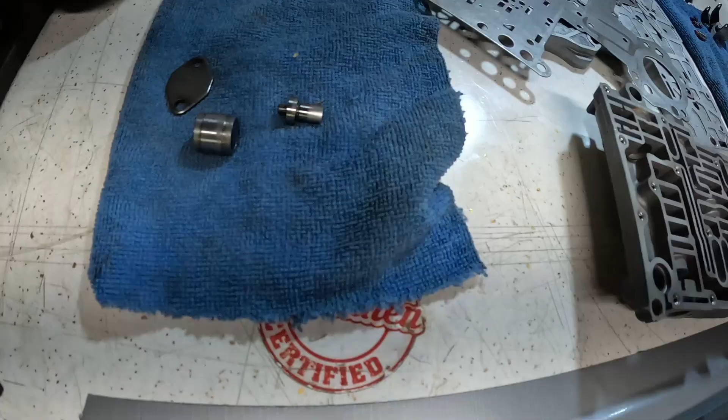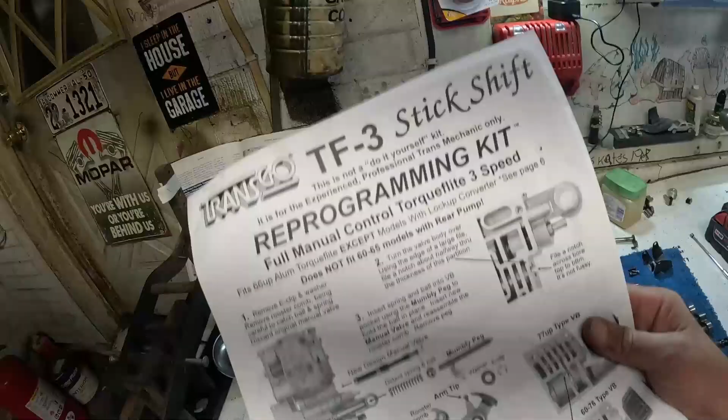All right, so let's get into the kit. Here's your instructions, and they're big and well written. Do yourself a favor, go through these instructions a couple times, just kind of familiarize yourself with it. As you can see here, I've X'd out some spots that don't really pertain to me. This is a 904. This kit does cover 727 and 904, but there is some 727 stuff that won't be necessary. Okay, here's what you get in the box.

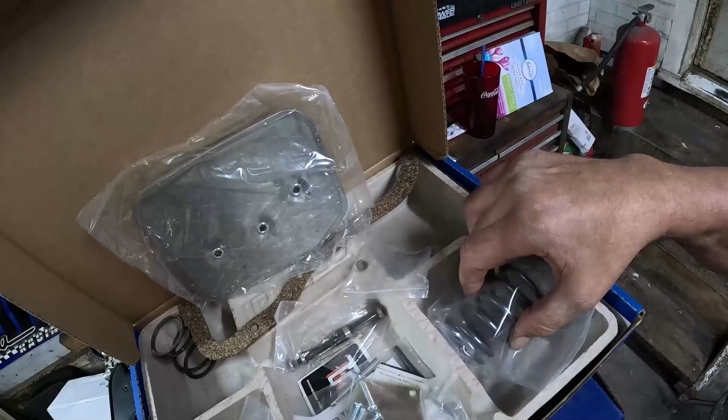Here's a spring. This part here is probably for the 727, the rear servo spring. This one's the 904 one, so we'll actually have to take our rear servo out and install this spring. Okay, just leave it right there for now.

You got some assorted springs, a couple of plugs. One's got an orifice, and there's actually one that is just a plug. It's probably in here somewhere.

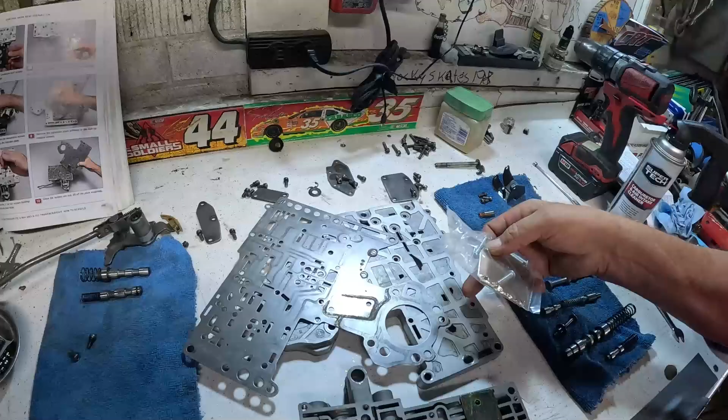There's a shift command plate, and I don't really understand how this works, but if you look at it, it looks like it will. How's it go on? Does it go on like this? I think it goes on like this, so it leaves this hole open, but it kind of seals this hole off. That's all I can figure.

Okay, it comes with this little fixture or jig or whatever, and that's for drilling into the casting. And so what's unusual about this is it's already got, somebody already went in here before and drilled the hole in this casting.

There are several variations of the TransGo shift kits. Some of them are like a systems correction kit, no yo-yo, stuff like that. There's a TF1, which is an entry level, probably just more like a heavy duty for towing or whatever, and maybe for fleet vehicles like taxi cabs, cop cars, stuff like that.

The TF2 is the next step up, and it's a full automatic, and it's got really good, positive, firm shifts. The TF3 is full manual. That's what we're doing here.

So as you get into the kit here, our manual valve will be swapped out for the one that's in the kit. Okay, that's right here, and the kit actually has something known as the mumbly peg, I think, which is kind of a funny name. But here's this valve will go in place of this valve here.

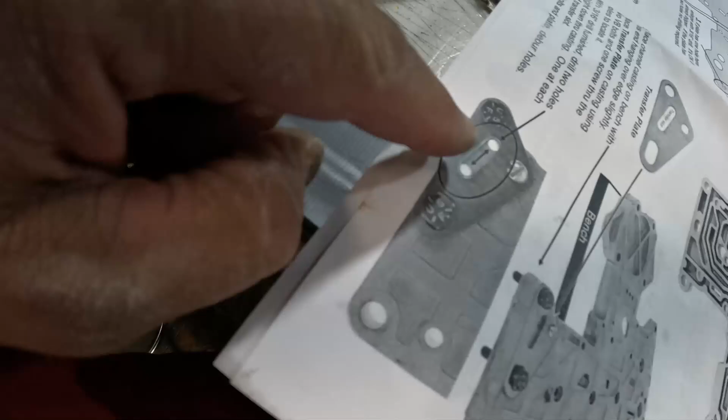We'll need to drill a couple holes in our transfer plate here, for my build or whatever, and then here also. You may have to drill additional holes, depending on the year of your valve body. Then on this casting, we drill a couple of holes here, and then it gets this little transfer slot, sort of rig, kind of like whatever, in place there. Then it gets that cover plate on top of it. All right.

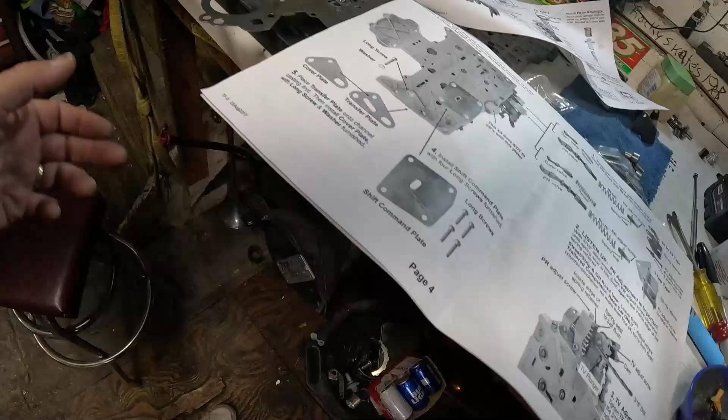So let's see, what else we got here. So this is the 727 rear servo piston, and so that doesn't pertain to me, so I've kind of X'd that stuff out.

I guess I already went through it, but our 904 has this short PLAIN spring that's going to go in our rear servo, so I'll have to take that apart.

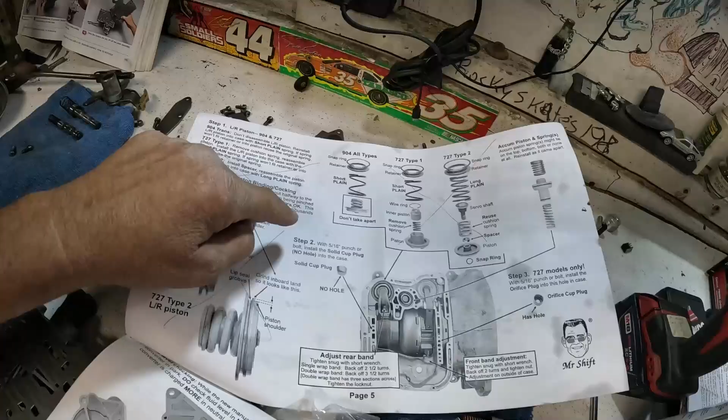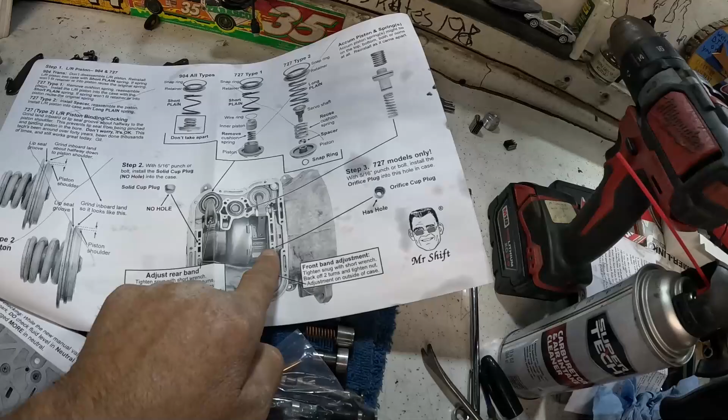Accumulator piston spring, it gives you instructions for what to do there. There's an orifice cup plug that goes in up here. That's for a 727. There's a solid cup plug that goes in back here, and that does not have a hole in it back here. So, like I said, you just gotta kind of go through the instructions and get it right.

I've X'd that out because this is for 77 and up. Mine's 60-76, so I'll have to do this. Put a blue spring in there. Make an adjustment to the pressure, the PR adjust screw.

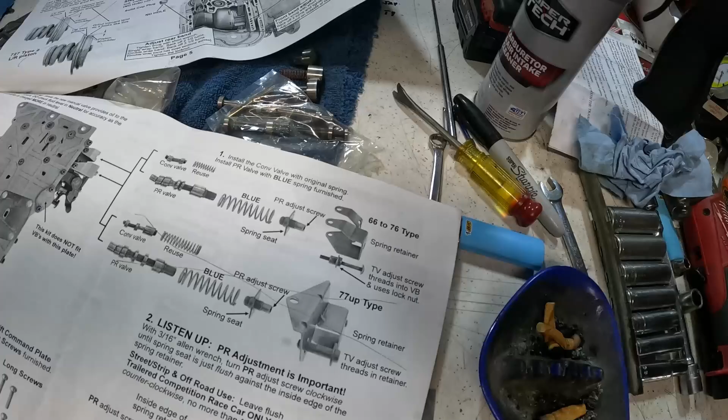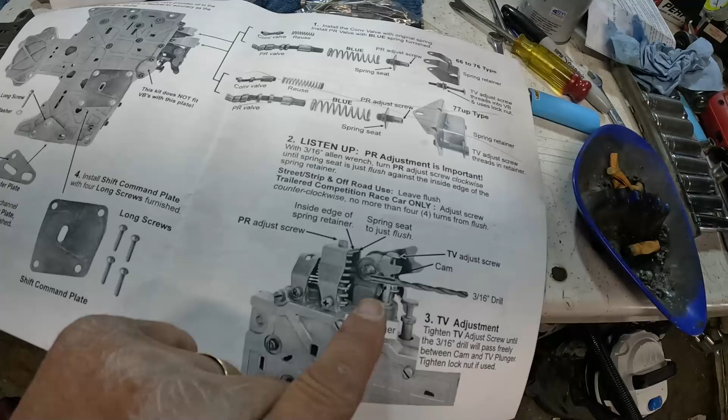It shows putting that shift command plate in place. It shows using a 3/16 inch bit. Check your clearance here.

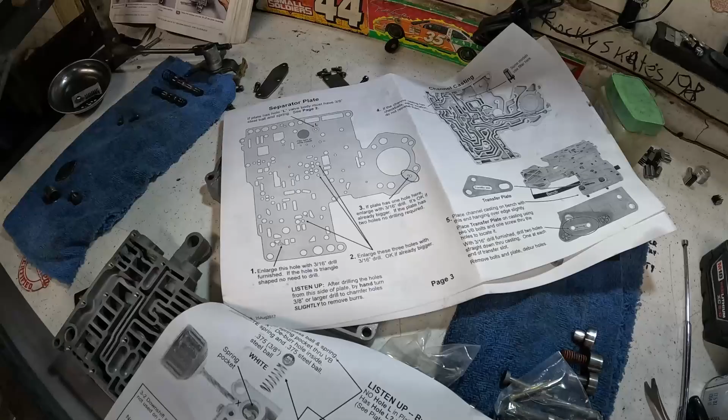Shows separator plate holes that need to be enlarged. And if it doesn't require a hole, it doesn't get one. Okay, so like in my case here, the separator plate, it's got these two little holes here. Mine's actually got one big single hole here. Okay, so I just leave that alone basically.

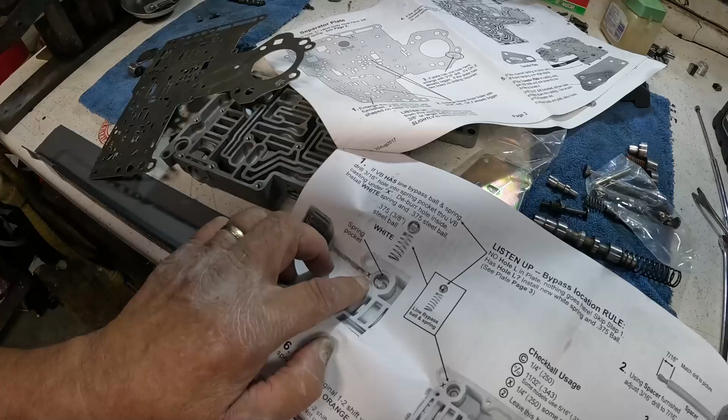Line bypass ball and spring. Mine's got that, but it says here to drill a 3/16 inch hole in the side of the casting here. Deburr the hole, install the white spring and the 3/8 inch ball. Okay, and I've got that sitting over there.

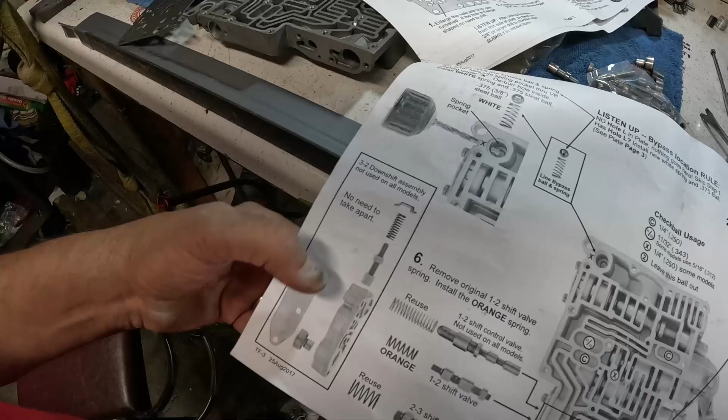This is a kick down valve or whatever, valve assembly, and my valve body doesn't have that.

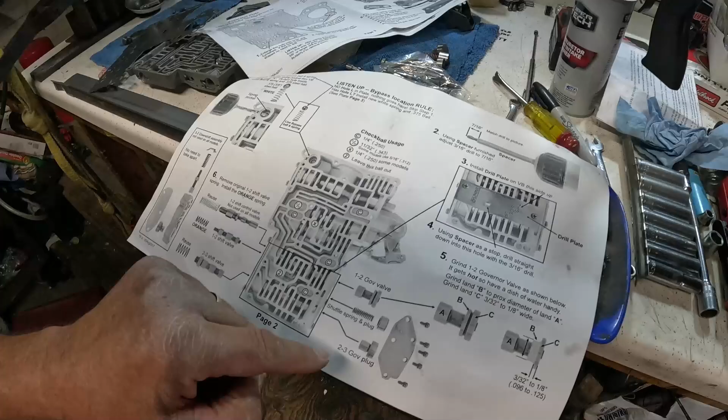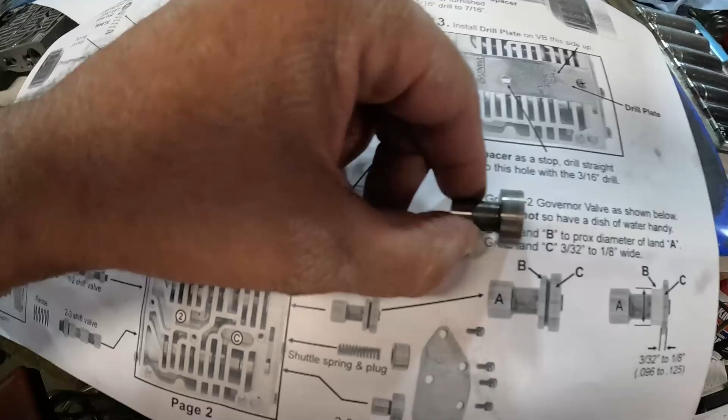Let's see. Yeah, then you replace, there's an orange spring there. Reuse these. This governor valve, we actually have to modify it, so it goes from this, and here's my governor valve. Mine looks like this. Okay, but I'm gonna have to make it look like that. Okay.

Not too difficult. There's also a little spacer that comes in the kit, and then you measure your drill bit, so it's 7/16, and that's basically for a hole in the casting that's already been done for us. So that's kind of all right.

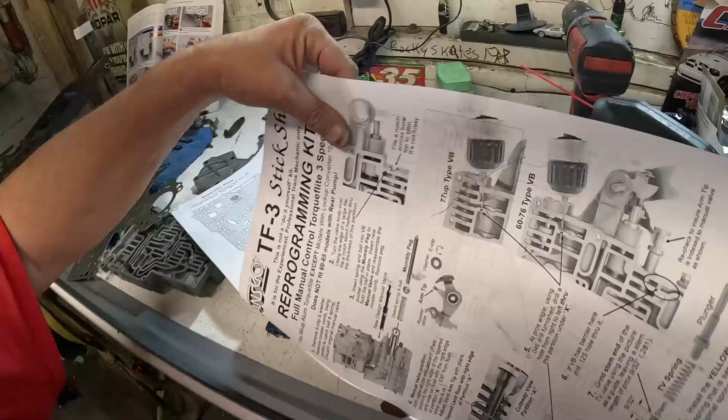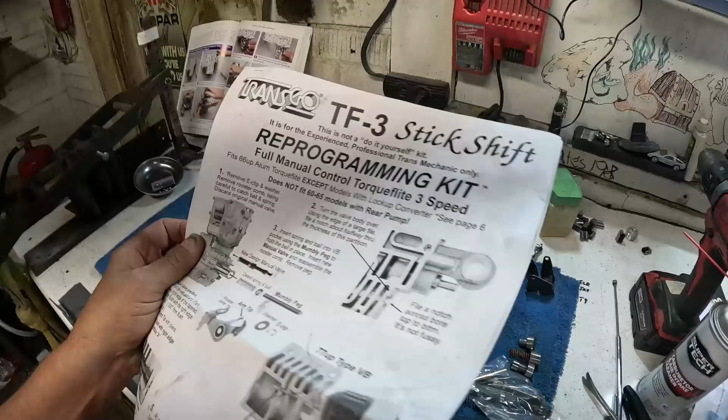So yeah, this kit does not work for 60 to 65 models that have the rear pump. And also it does not work for torque converter, for lockup converter valve bodies.

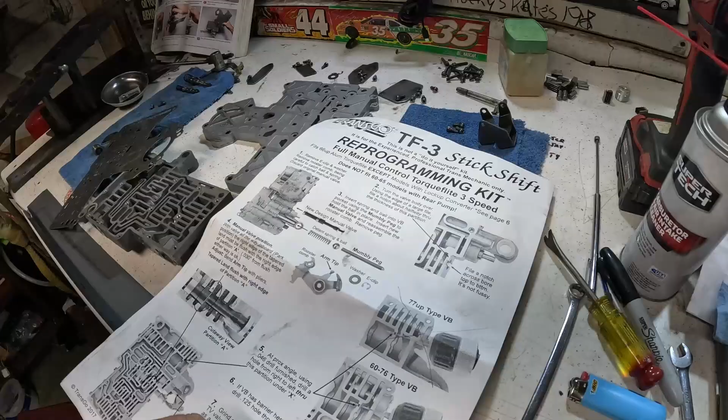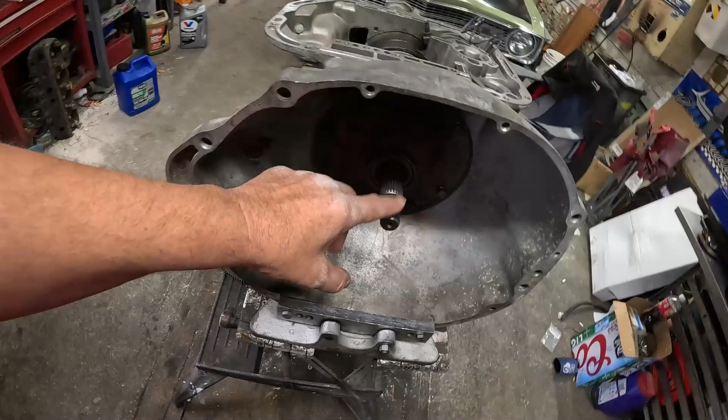But they do say see page 6, and they've got a kind of a workaround, I guess, and it's kind of at your own discretion as far as I can tell just by quickly looking at this. They tell you how you can do it if you really think you absolutely have to, and you'll have a lockup converter if your shaft is machined smooth on the very tip of the input shaft. So that would tell you that you have a lockup converter or a lockup transmission.

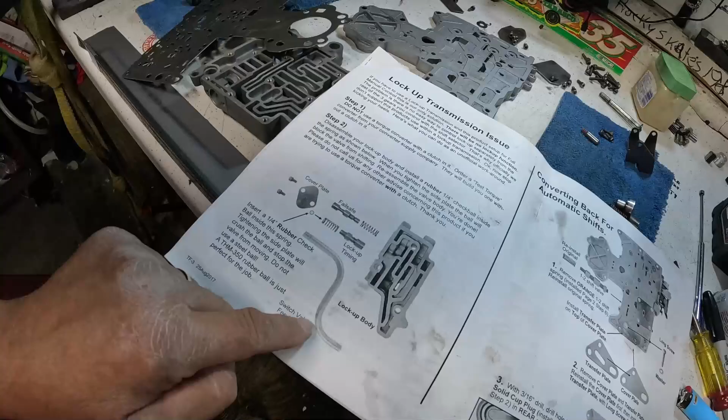There's also this line here inside the valve body. But you can actually order a test torque converter from your torque converter supply company, so it doesn't have a clutch in it. That's up to you, I don't think they recommend it. Anyway, I'm going to go ahead and get set up and start drilling.

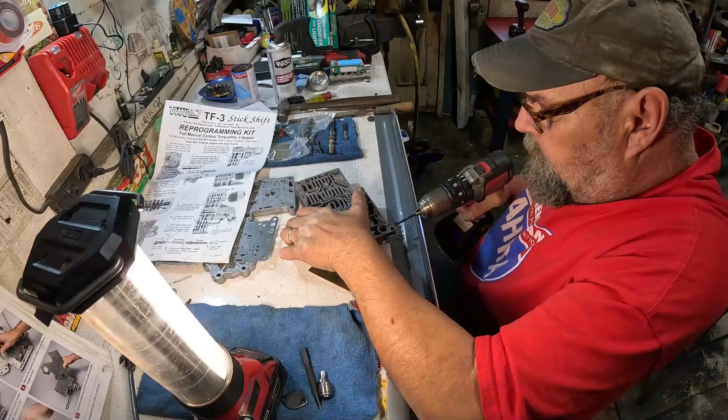Our instructions have us filing a slot right here with a file, about halfway through the casting. It's not picky about that. We also, in our case, drilled a 0.125 hole in this casting here.

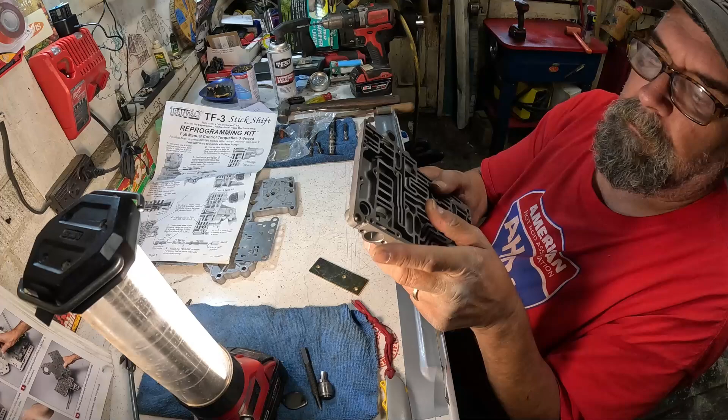What else did we do? Well, we still have to drill another hole in this yet, a 3/16 hole where this check ball and spring was at. Okay, that's right there.

Then we drill this hole, it's already been drilled, but a 3/16 hole here using the little fixture they give you. That just bolts into place, and then you set your bit with the guide that they install or include also. The .046 bit was supposed to be included in the kit, but I can't find it anywhere.

So, alright, we'll be back.

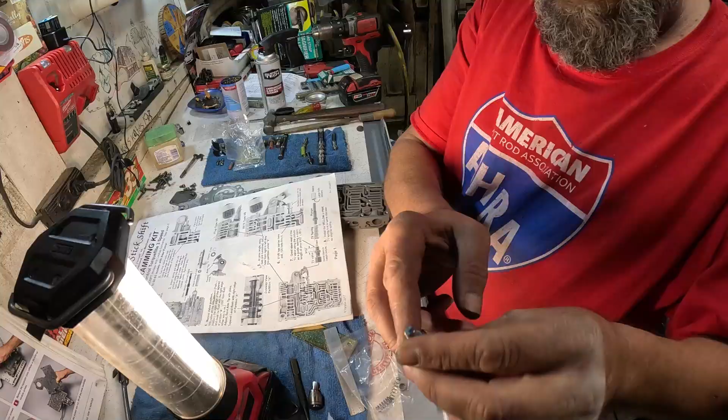Our throttle valve needs to be ground down to 9/32 of an inch, just a pube over a quarter basically. And then the kit gives you the choice between a pink spring or a yellow spring, that'll go on in here. It's whichever one matches the diameter of your old spring. So in our case, the yellow spring is going to go here.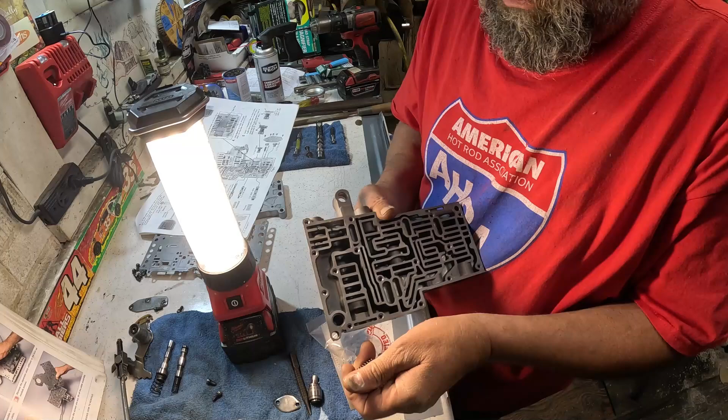So we drilled a 3/16 inch hole in the casting here where the spring and check ball goes. Okay, and that was kind of like this.

Make sure you deburr the hole from the inside, and then replace this spring with the white one that's in the kit. Oh geez, there it goes. So we'll get rid of this and install this when it comes time to it.

The instructions want you to whittle away at your governor valve, and typically it looks like this. They want you to grind it so that it looks like this, 1/8 inch to 3/32 of an inch, and then this area here, B, should be the same diameter as this end here. So we just took it over to the bench grinder, and it's a little sketchy, and it gets hot, so have a little bit of water with you, but grind it so it looks like that. Occasionally we'll take it over to our machinist buddy and have him do these because it turns out really good that way.

Back here is our 1 through 2 shift valve, that gets an orange spring. So when we reassemble it, we'll install that with it.

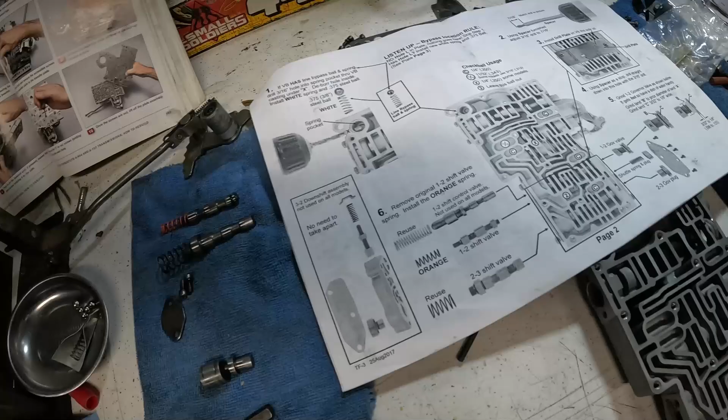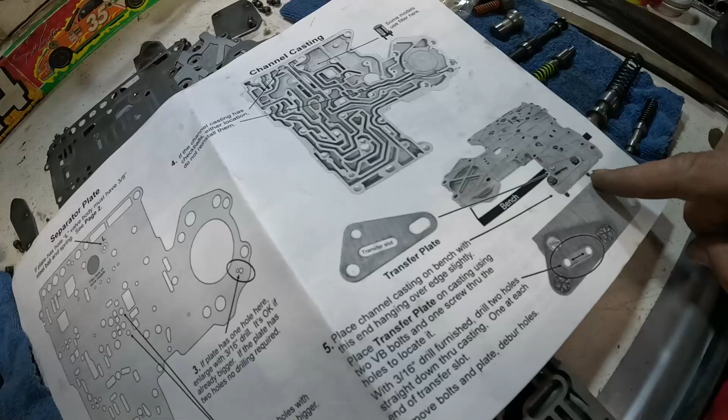We're gonna drill some holes in the transfer plate or the separator plate, and it's got us doing this transfer plate mod also. So we'll drill a couple of holes in the casting here, and I'll go ahead and get set up for that, and then show you what we got done.

So there we have it. What, scratch it on the ground? You bet, yeah, that's not in the directions anymore. We gotta find an old direction set. We should, right?

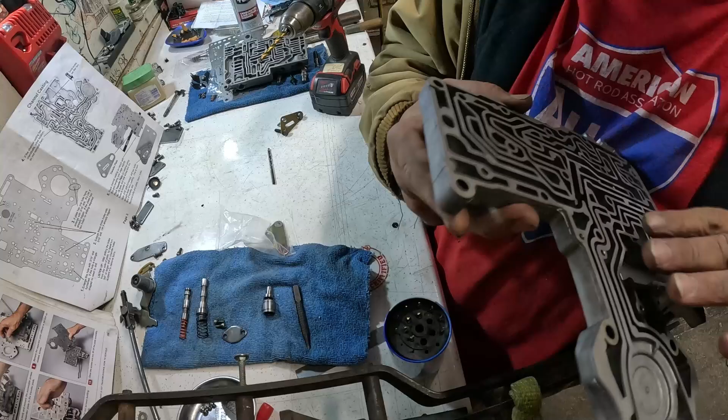So that's a transfer plate mod, and there's a hole here and a hole on the back side. So once you start assembling everything, this plate will go here, and then the cover plate goes on top of that, making a little channel from that side to that side.

I guess I was kind of wrong. There was actually a .046 drill bit in the bag, but it's so small.

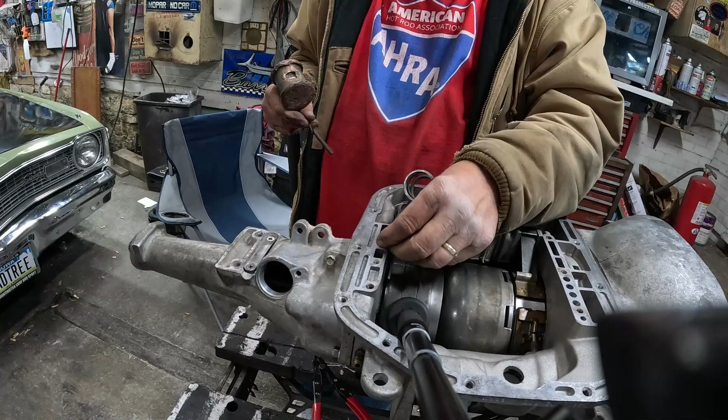The instructions have you throw in a solid plug and hammer it in with a 5/16 punch. I couldn't find a punch, so I'm just going to use a drill bit I don't care about, because it's Jeremy's drill bit.

There we go, good enough. You know, this is a purple spring - what the hell's up with that? This one's purple too, I wonder if it's the same. It's not the same spring - that thing's got way more tension on it than this one.

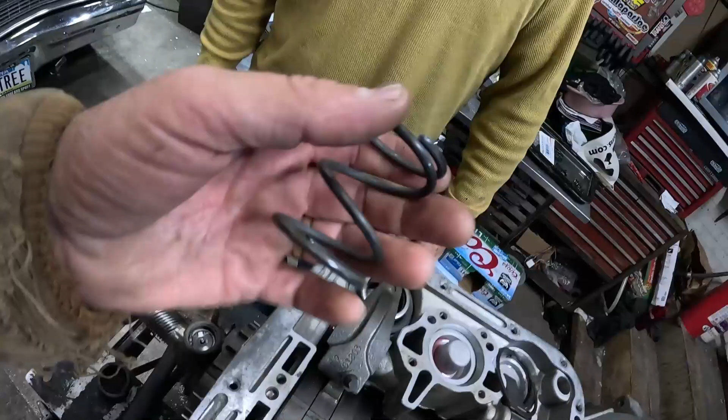So here's the issue: according to our TransGo TF3 kit, we need to replace this spring with the factory one. But guess what we've done? We've already thrown this transmission kind of together, and there's no real way to take this apart with this in the way.

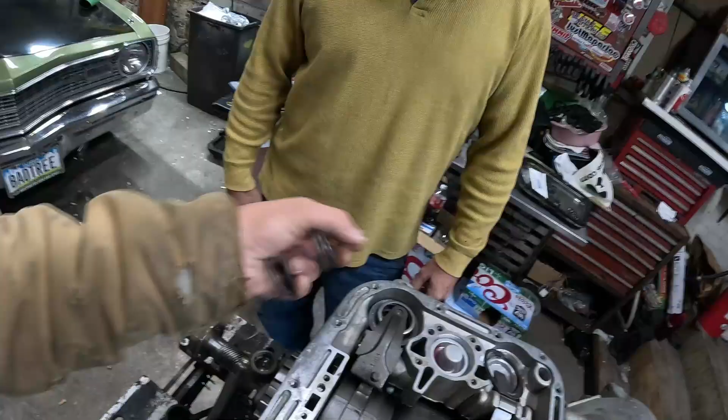So what we're going to do is we took the tail shaft housing off, and we need to remove this shaft in here that holds this in place. And how we can do that, Jeremy? With a valve body bolt. Way to go.

Get it so the inside is good and across. Yeah, the inside of the shaft is actually threaded. What thread pitch is that? I think it's less than quarter - probably a 10 something. That's all there is to it.

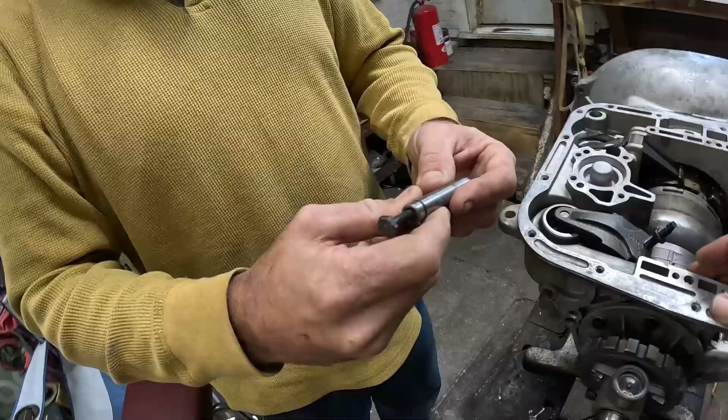We got an O-ring here - we should probably see we have one. We do, I'm sure we have to. Let's see, there's the threads - hard to see, but now that should come out. There we go, just like so. So there you have it.

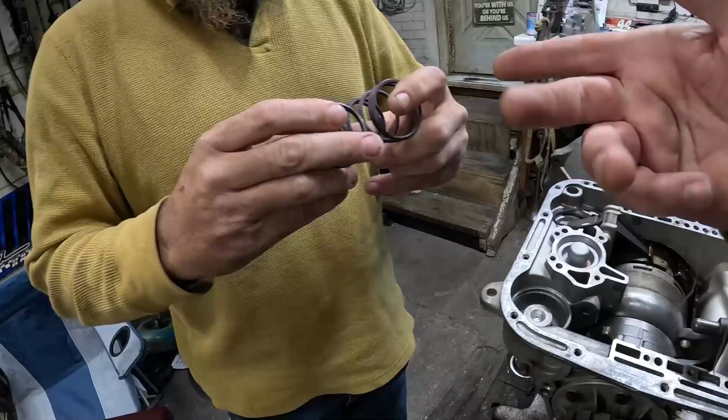We'll show the difference. So this is kind of odd because this has got some purple on it, right? Is that purple, or why am I asking you? But shut up, Jay, suck it. So less coils, less height, but substantially stiffer.

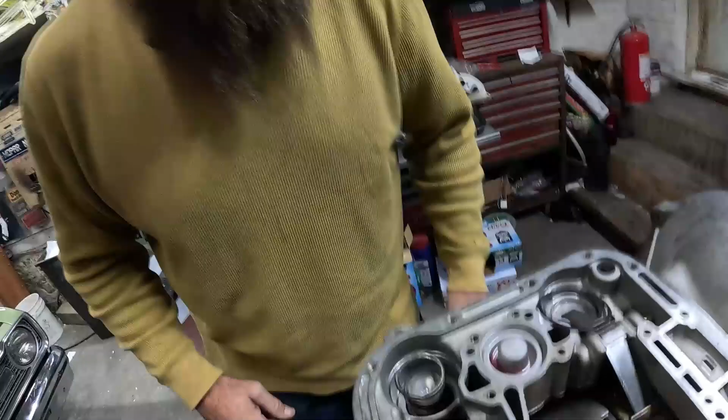Right, I'll hold the camera, you put it in. I was gonna say, you want me to keep her going while you thumb it in there? These look like Vienna sausages to you? Oh, that's much more substantial. What are we gonna do? Get a C-clamp - hey, do I have one? Oh, I suppose that.

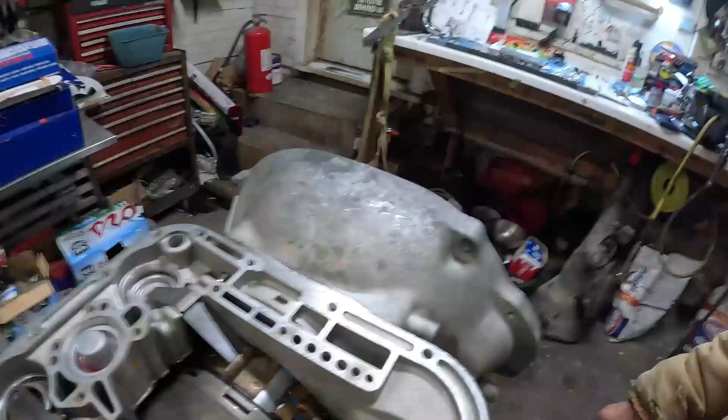Okay, so anyway, we're gonna go ahead and get on with our final clean.

You'll want to make sure that the valve body is machined - it's got tight tolerances. You want to make sure that there's nothing in it, it needs to be spotless. So take your time, clean it. Get yourself a 6-pack of carb cleaner, and some compressed air really comes in handy. Just really go at it and make sure it's spotless.

As we go, we'll test our valves and make sure that they slide in their corresponding channels freely. If something's sticking a little bit, you might want to dress it - I actually used some 2000 grit sandpaper on a couple that seemed to be sticking. So just pay attention. With that, we'll get into the final clean, and then set up for some highlights.

Stick around. So here we're going to install our Sonnax style detent pill, I guess you could call it - kind of a bullet shape. There's a spring in there, and it just stabilizes that better than the spring and ball that used to be there.

The TransGo kit includes what's known as the mumbly peg. Kind of a funny name for this, but it's cupped on this side, pointed on this side, so the point will actually stick into this, and the cup side will go toward your ball end of the detent deal.

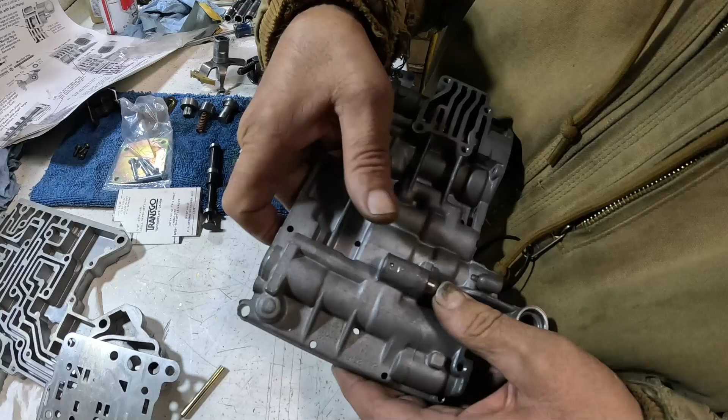So that kind of sticks a little bit. I'm going to have to check that out. We've got an issue with this pill - just to be clear, this is not a Sonnax pill, but it's similar. The spring itself doesn't stick inside the pill, but the pill itself will actually stick in the casting, in the bore of the casting.

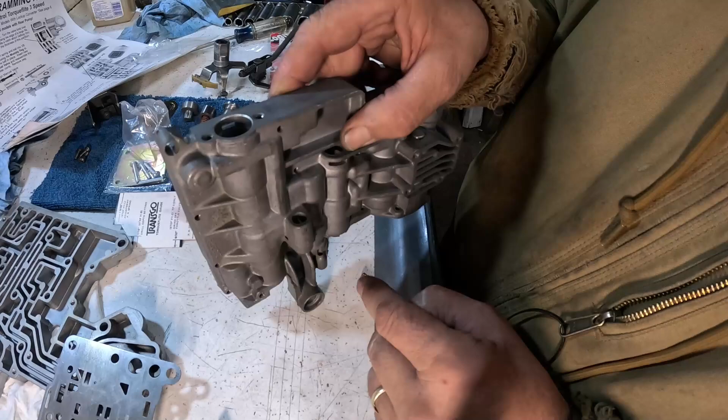So, I guess what's going on is there's actually a pin in the back of it, and they drill a hole and put this pin in place so it retains the spring. Then they swedge it, so the swedge must have distorted the metal in the back. So what I'm going to do is grind the very end of the pill.

And ensure it slides back and forth easily before I continue. So this went over - I chucked it in my drill, took it over the bench grinder, and just beveled the very end. And now it slides in and right back out. Wait, what?

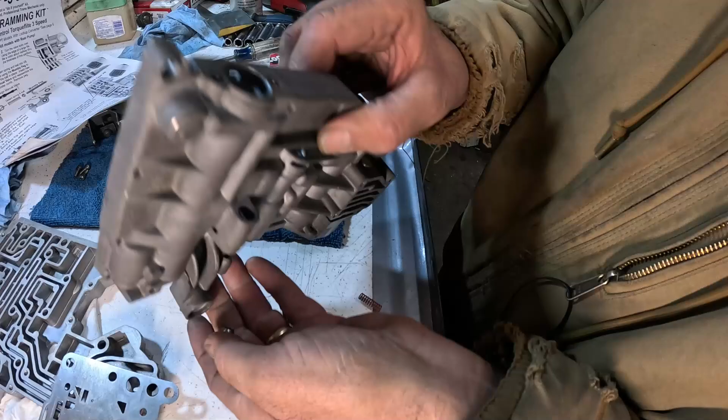Maybe I'll have to polish on it a little bit more.

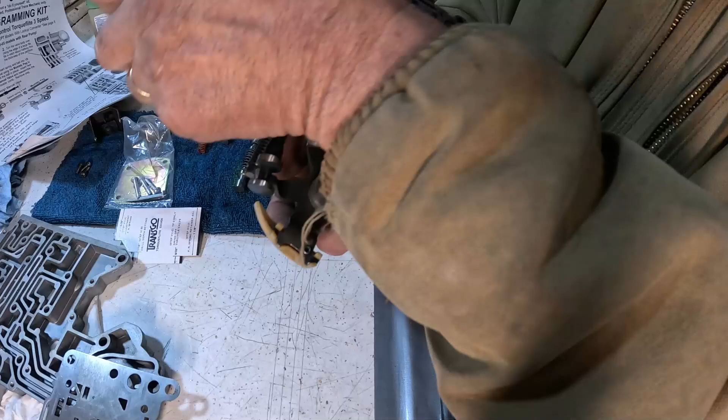Second, third, neutral, reverse, park.

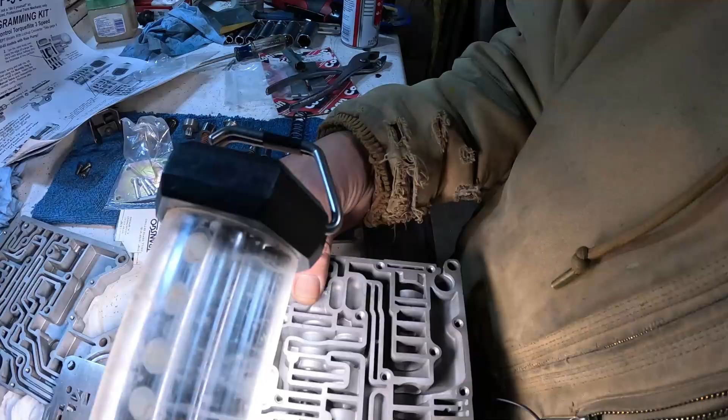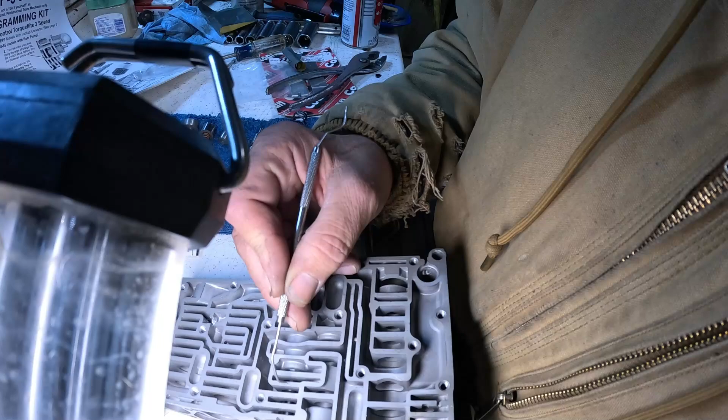Okay, I don't know if you can see this or not, but I'm guessing this is partition A, and this is the land we're looking at. It needs to be flush with the right - I guess it depends on how you're holding it. Okay, yeah, you need to be holding it in this direction. I got it wrong, but anyway...

Yeah, that land needs to be flush with this partition right here. So when it appears that ours is, if it wasn't, we'd go ahead and bend the arm tip so it lined up. But this looks like it's good to go.

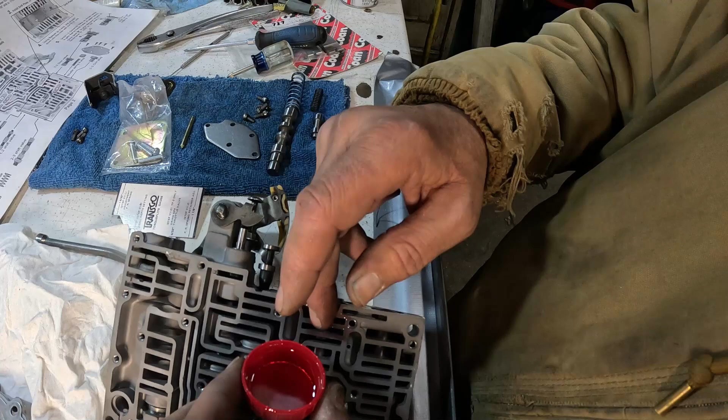That is, it just doesn't want to - it needs to go in its bore, I guess, before I can throw that plate on it, but it's under some spring tension.

I'm going to snug these all up later. The torque spec is 35 inch-pounds, or, you know, tighten them with just a Phillips screwdriver. Tighten them up, snug them up good. Tighten them hard with a screwdriver.

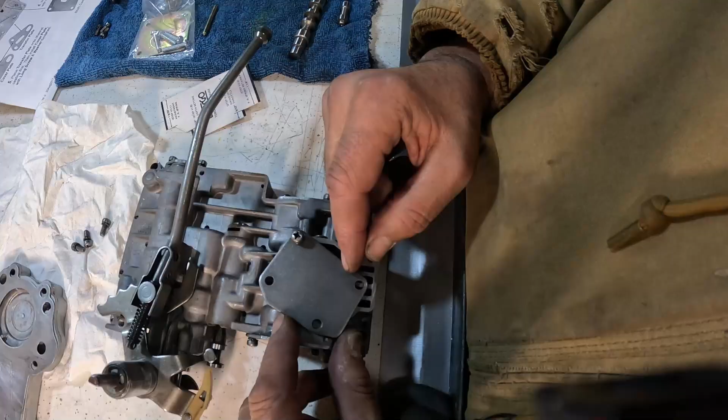Some valve bodies have like a 6-screw cover plate here in this area. Ours just has 4, so we removed it just to clean it. So we'll simply reinstall this plate.

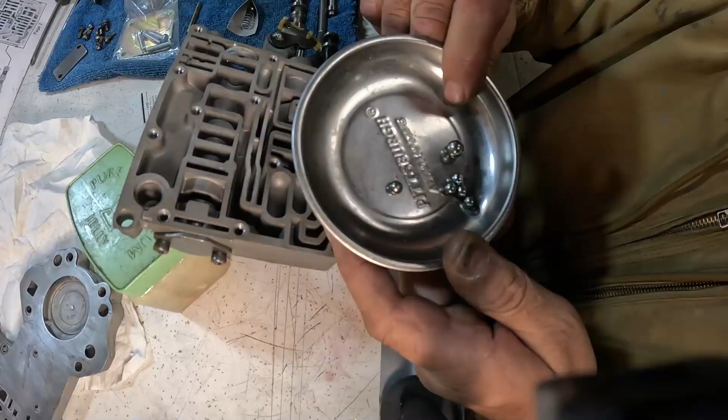All right, we got some balls left over here. Okay, they're going to go inside. We've got 5 1/4-inch balls, and one 11/32 ball. You want to make sure you don't confuse that with the 3/8 ball. I kept it separated with a piece of tape here.

This is the line bypass ball and spring, and that'll go in this location here. For our purposes, we're not going to install a ball that was previously in location 2, according to our directions.

And our 11/32 ball goes in this channel. Ball goes there. Ball goes there. No ball here. That's our ball left over.

That'll go in this location here like so. All right, you want to make sure there's no sticker residue on it.

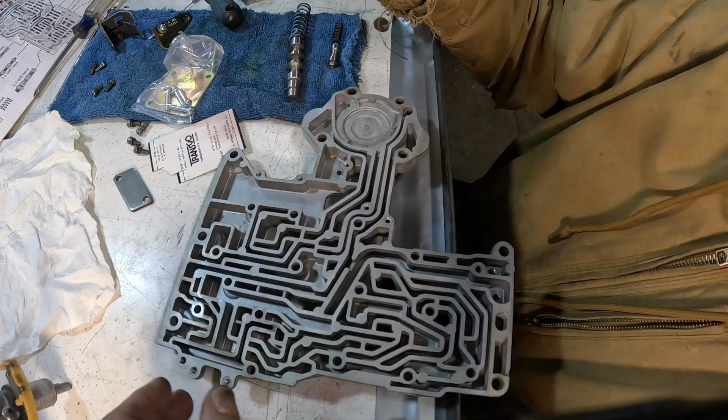Here's a transfer plate. Sometimes you'll have additional items that go in here, maybe a filter or maybe another check ball. Ours doesn't have anything, so we'll go ahead and install the separator plate on top.

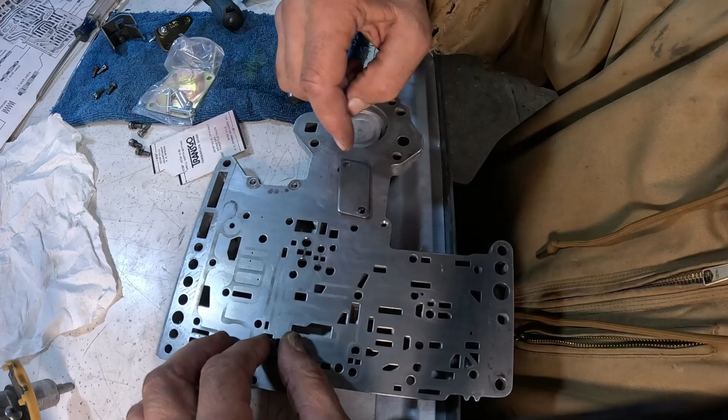And then it's like a stiffener plate, and they're kind of different shapes. Then we'll go ahead and throw these short screws in finger tight.

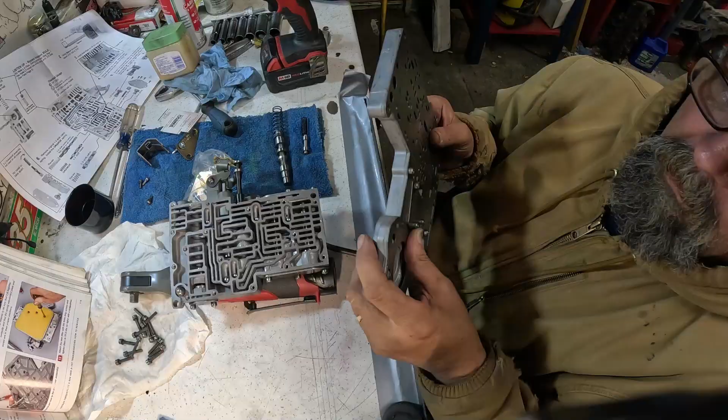Okay, you want to go ahead and tighten your transfer plate screws to 35 inch-pounds, all right? And then we'll go ahead and assemble the separator plate to the main valve body casting.

These are longer. These are slotted in this case. Straight screwdriver.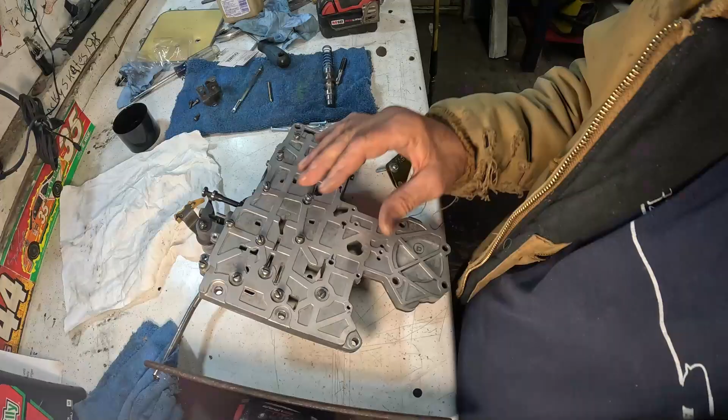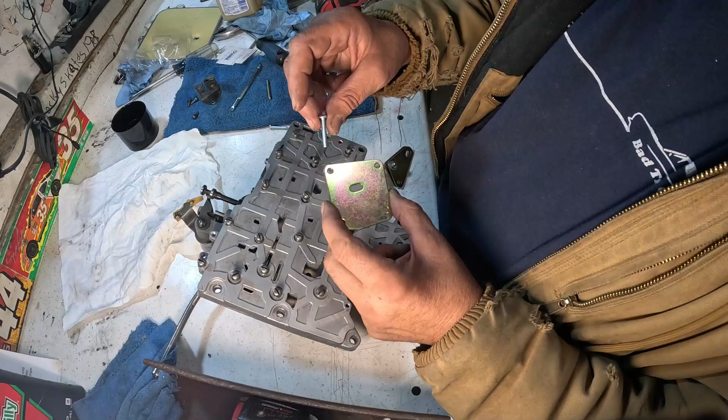Okay, so our kit comes with what's known as a shift command plate, and that'll take the place of these screws here. The kit provides screws - they must be a little bit longer or whatever. That'll go in the place of these screws here.

So I'll remove these screws, and then the shift command plate goes one way. I guess it goes like what? Doesn't go like that. No. I go like this.

Goes like that. So I don't know, for whatever purposes, this basically kind of blocks this orifice here. So don't ask me why, I just do.

Okay, and then the kit gives you a transfer plate of some sort. Previously we had drilled 2 holes in the casting, and we'll need to discard this screw, and use the kit-provided screw. So this is like a transfer plate and then a cover plate.

All right, and that'll go right like this. This will depend on the valve body - the main valve body screws hold this in place also, okay? And then when tightening all these screws, you want to start at the center and work your way to the outside, all right?

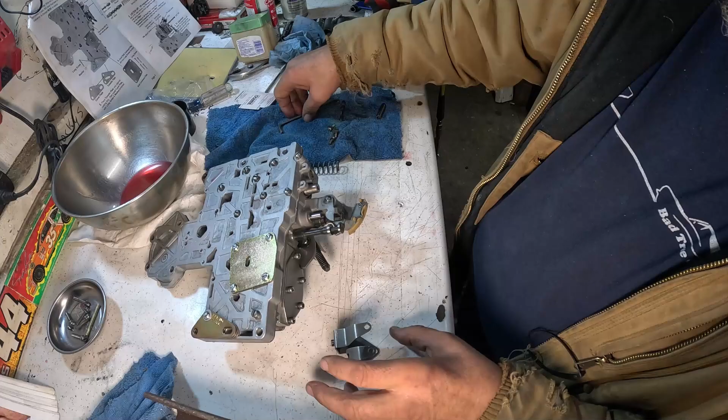All right, the kit directions want you to adjust this Allen—it's a 3/16 Allen—and adjust this plate so it's touching the top of the spring retainer. Maybe I'll do that right now, or maybe it'd be better with it in place, but I think it'd be better if I did it now.

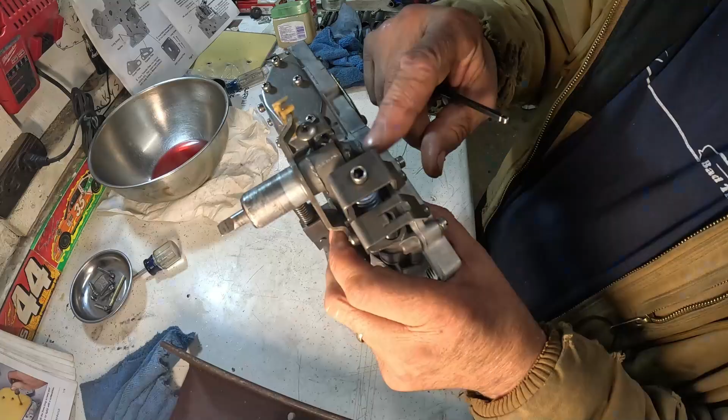Once you get the spring retainer, I call it a cage, in place, you want to turn this Allen head—it's a 3/16 Allen—clockwise until this plate comes up flush against the retainer itself. For a street strip or street car, that's where you want it. You could actually turn it counterclockwise up to 4 turns for a drag race only car, something that's trailered all the time. But for our purposes, we're going to do exactly what we did here.

Next we'll have to make an adjustment with our throttle valve adjustment here. We'll get a 3/16 drill bit and adjust the screw down, then lock the nut.

So I've been actually installing a kit like this, probably like TF2, TF3 kits, for maybe 30 years or so. That's not to say I've memorized how to do it, but there are a few things I've noticed that have changed over the years. And one of those things is your kickdown.

So the old kits, the old TF3 kits, stated that if your rig does not have a kickdown assembly—that Rube Goldberg, whatever, bell crank and all that stuff—and if you're not going to use the Lokar cable or whatever, you could actually wire your kickdown lever so that it was in the wide open throttle position.

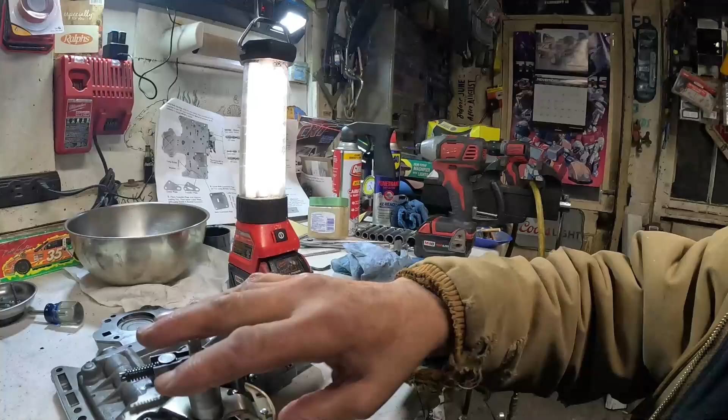With that in mind, what we usually do anymore, in my case, is I'm not going to install a kickdown, and I'm not going to install this lever and then wire it back. Usually what I do is get a stack of washers and put them on the screw here, so this actually pushes that kickdown valve all the way in. Then you can adjust the slack with the screw and lock the lock nut. So that's what I'm going to do in this case.

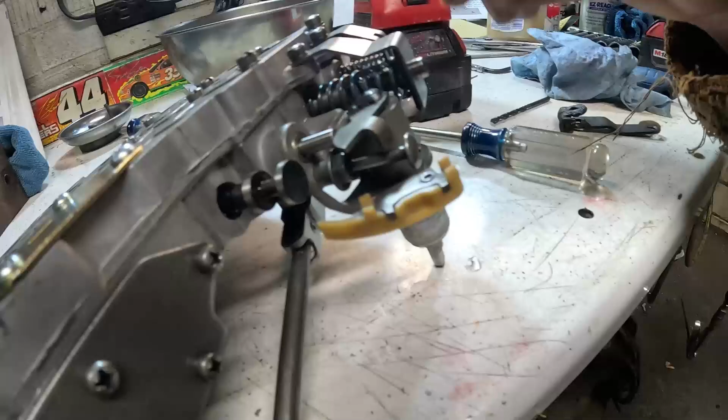But anyway, the washers, you'll find some washers. Or we've machined a little bushing before too, that has the same diameter as the screw, and we put it in this place so it's pressing down on the kickdown valve, and that's going to give you more throttle pressure all the time. But to me it's not a big deal, so at your own risk, I guess.

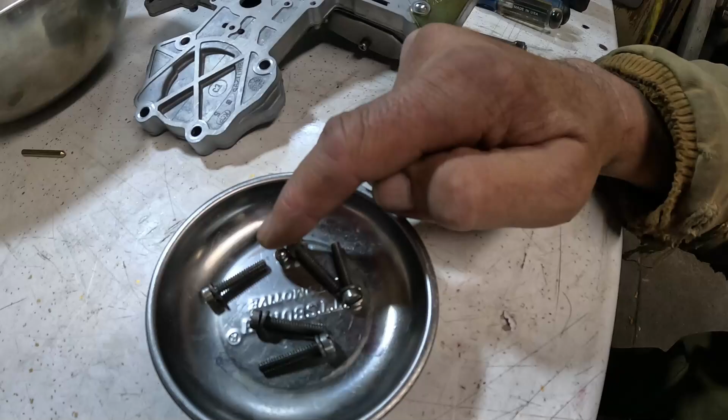When it's all said and done, all you should have left after your build is 5 screws and a check ball. The 5 screws were replaced by the screws that came with the kit, and the extra check ball was eliminated because of the instructions of the kit. So there you have it—you shouldn't have any extra parts.